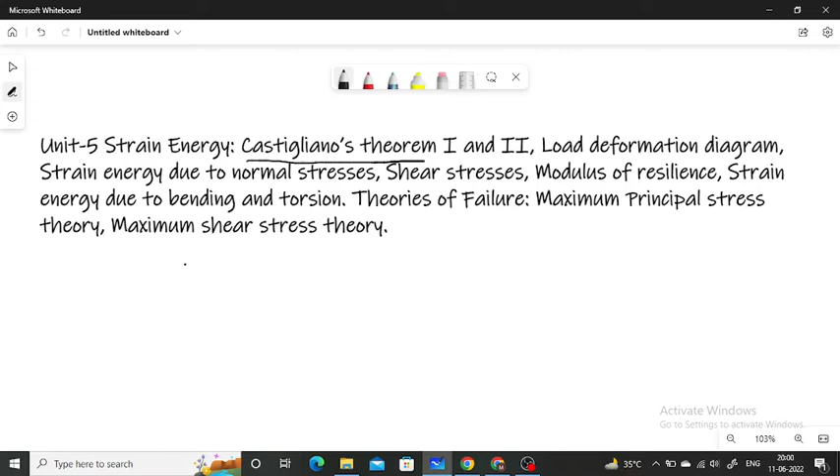What is Castigliano's theorem? Castigliano's theorem, first theorem states that the first partial derivative of total internal energy, known as strain energy, in a structure with respect to any particular deflection component at a point is equal to the force applied at that point and in the direction corresponding to that deflection component.

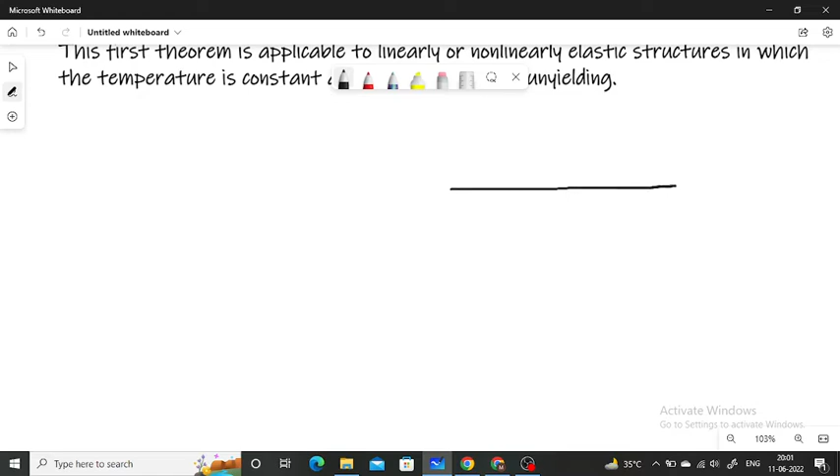Okay, explain करता हूँ। Let us consider a beam, a simply supported beam having point loads W1, W2 and W3 at a distance x1, x2 and x3 from the left support A.

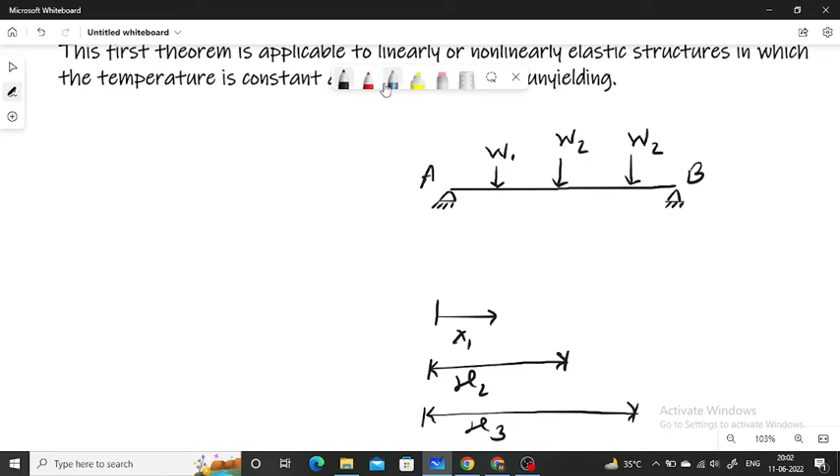Now, due to these point loads, the simply supported beam deflects like this. The deflection at point 1, where W1 point load is acting, is delta 1, the deflection at point 2, where point load W2 is acting, is delta 2, and the deflection at point 3, where point load W3 is acting, is delta 3.

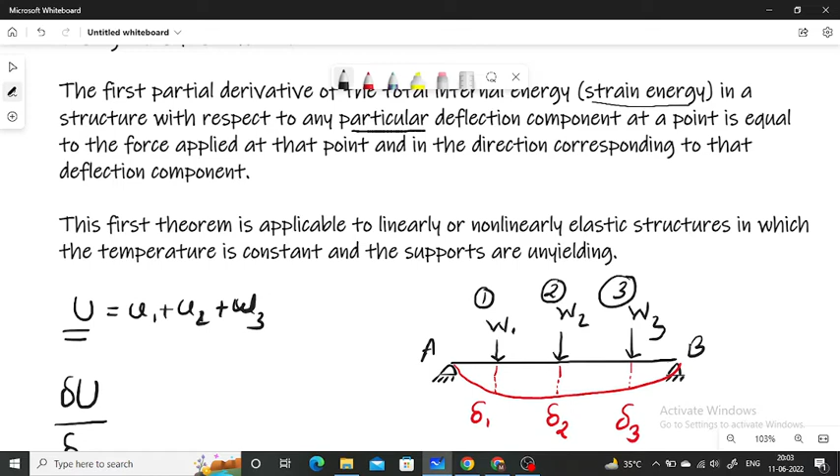According to the Castigliano's theorem, if total strain energy is U1 plus U2 plus U3 is U, then according to the Castigliano's theorem, the partial derivative of total strain energy with respect to deflection component is equal to the force applied. Castigliano's theorem के अकॉर्डिंग, the first partial derivative of the total strain energy in a structure with respect to any particular deflection component at a point is equal to the force applied. So the first derivative of total strain energy with respect to deflection, let this will be like this.

Deflection delta 1 will be equal to the load at that point W1. If we partially differentiate this total strain energy with respect to delta 2, then it will be equal to the point load W2. And last, if we partially differentiate this total strain energy with respect to deflection delta 3, then it will be equal to the point load W3.

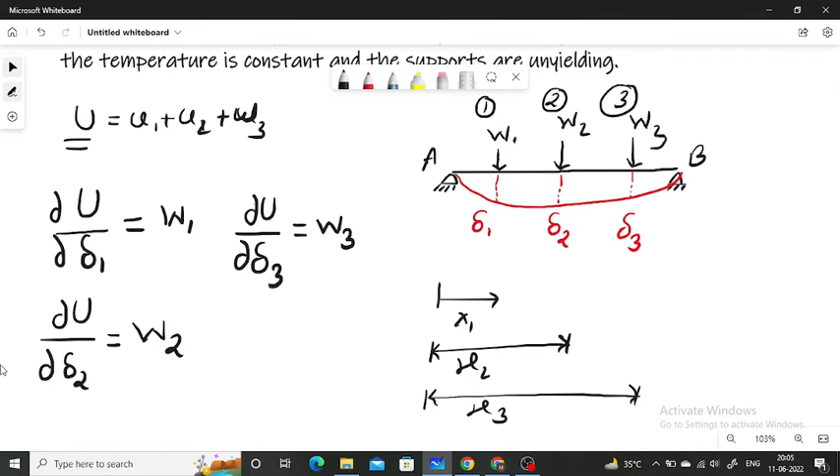Now according to the second theorem of Castigliano's, the first partial derivative of total strain energy in a structure with respect to the force applied at any point is equal to the deflection at the point of application of that force in the direction of its line of action.

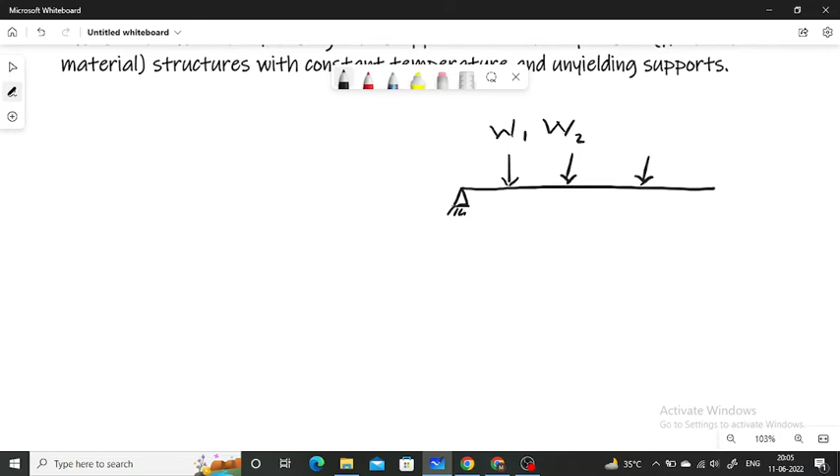Let a simply supported beam having point loads W1, W2 and W3, and due to these point loads the beam will deflect like this, and the deflection under this load W1 is delta 1, deflection under the load W2 is delta 2, and the deflection under the load W3 will be equal to delta 3.

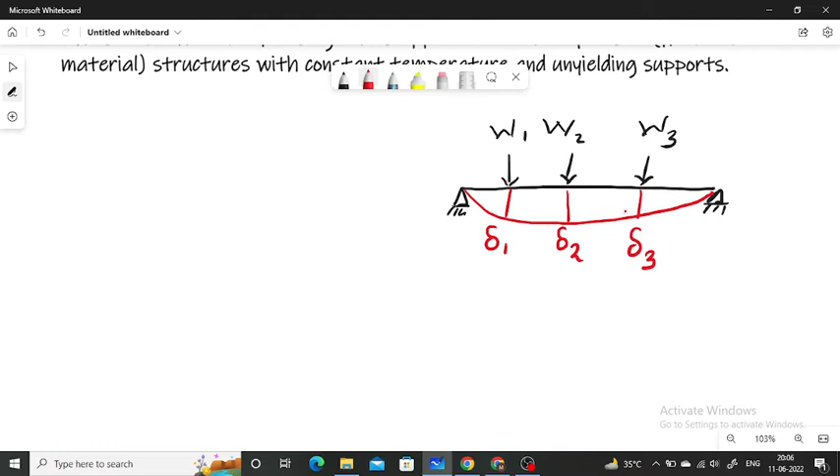If then in that case, according to this Castigliano's second theorem, the partial derivative of total strain energy with respect to load gives deflection at that point in the direction of force load. So del u upon del w1 will be equal to delta 1. Similarly, del u upon del w2 will be equal to delta 2, and del u upon del w3 will be equal to delta 3. This is the Castigliano's theorem.

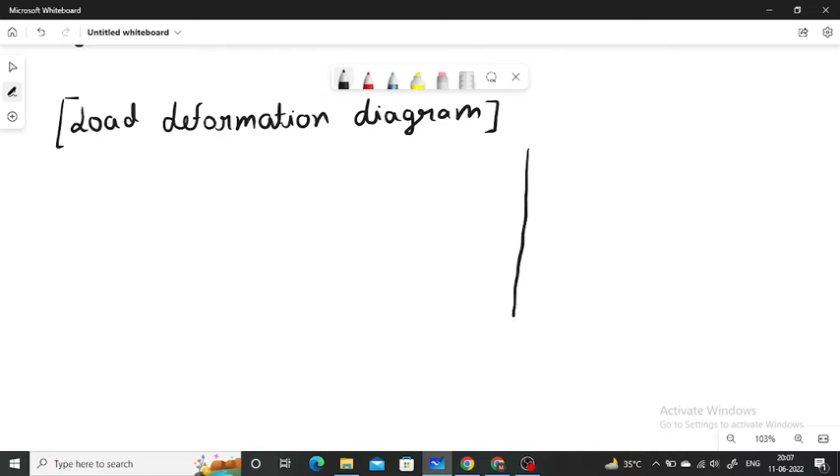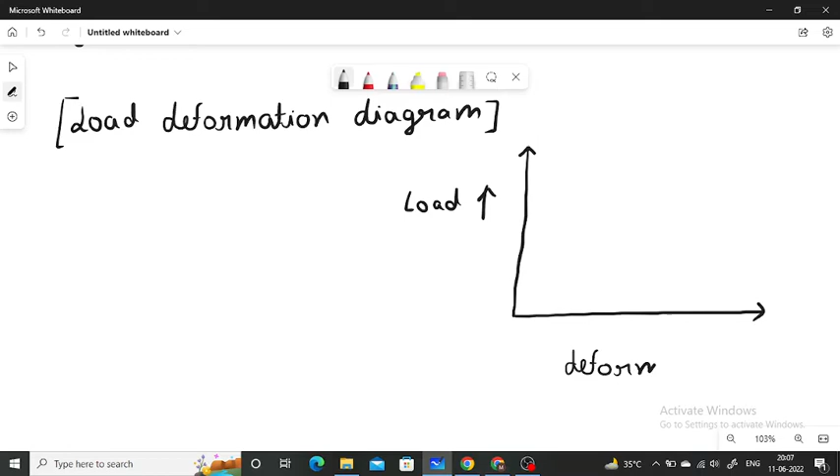Now, second topic is load deformation diagram. What is load deformation diagram? Curve between load and extension or deformation is known as load deformation diagram.

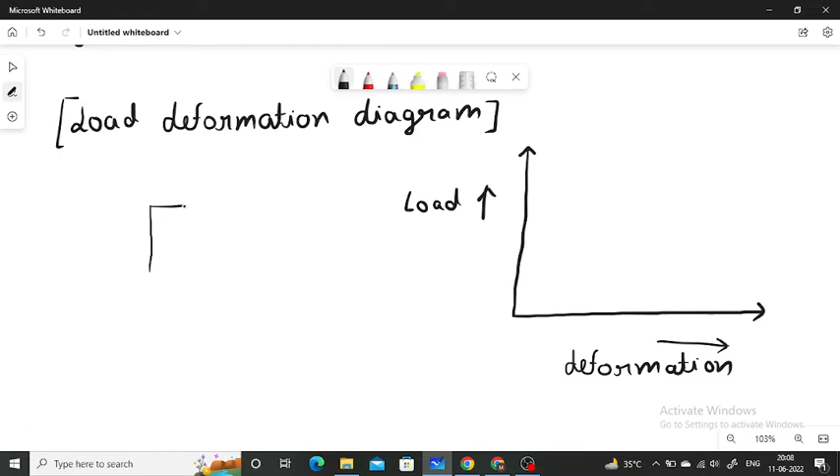Let a gradually increasing tensile force be applied on a bar. At t is equal to 0, force is equal to 0, corresponding deformation in the bar is 0. So at the starting, where force load is 0, deformation is 0. After gradually increasing the load, deformation will also change according to the load applied on the body. Now the curve plotted between these values is known as load deformation curve.

Okay, let's suppose at a point force is F1, so corresponding to this point on this curve, we can calculate, we can define the deflection at that particular point.

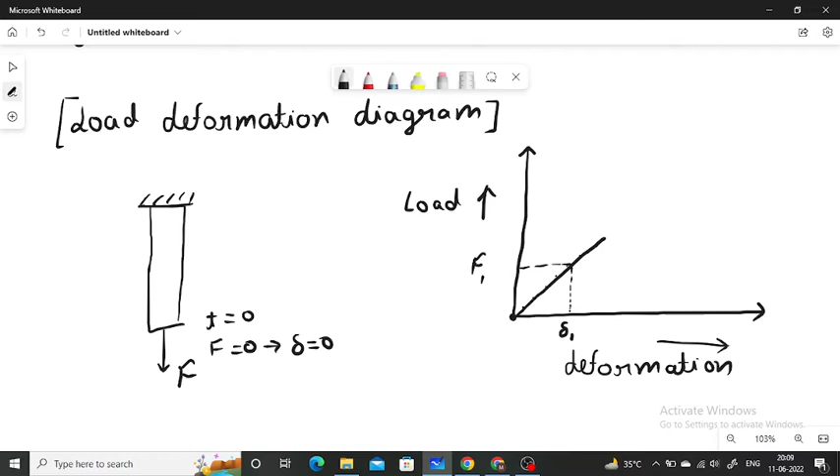Now the next topic is strain energy. This topic is very important. Now what is strain energy?

When an elastic body is loaded, it undergoes deformation. Its dimensions change, and when it is relieved of the load, it regains its original shape if the force applied on the body or material is within the elastic limit. For the time it is loaded, energy is stored in it. The same is released by the body when the load is removed. This energy is called strain energy.

So what is strain energy? Strain energy is stored energy. The work done when we apply a load on a body is stored in the body in the form of energy. This energy is known as strain energy.

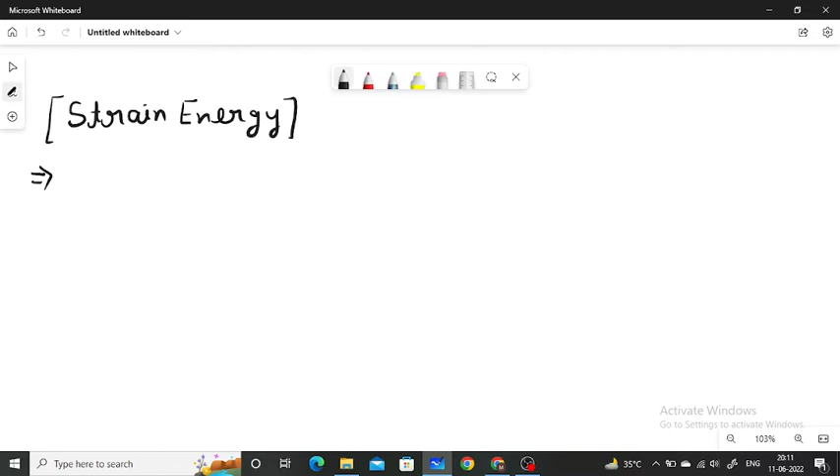The strain energy stored by the body within the elastic limit when loaded externally is called resilience, and the maximum energy which a body stores up to the elastic limit is called proof resilience.

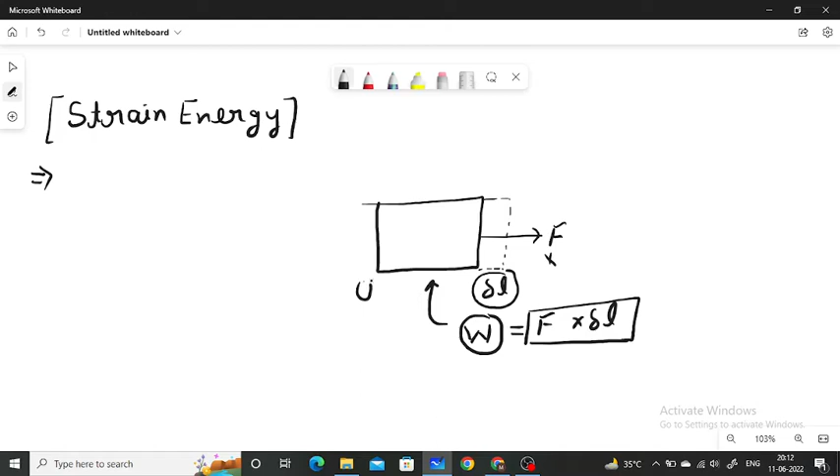So what is strain energy? When we apply a force on a body within the elastic limit, the body undergoes some changes, some deformation. So the work done by this external force is known as force into displacement. This work done is stored in the material in the form of energy. When the load is removed, due to this energy the body will regain its shape. This energy is known as strain energy.

Now, the strain energy stored by the body within the elastic limit when loaded externally is called resilience. So what is resilience?

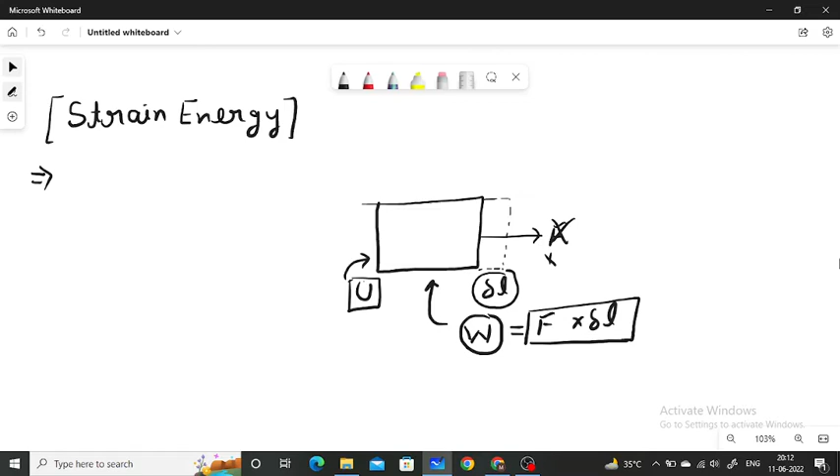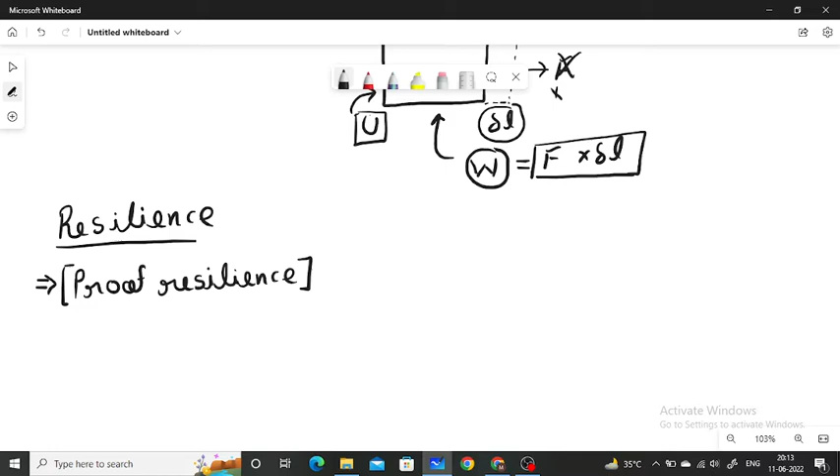Resilience is the strain energy stored by the body within the elastic limit, and proof resilience is the maximum strain energy stored by the body up to the elastic limit. Proof resilience is a mechanical property of the materials, and it indicates their capacity to bear shock.

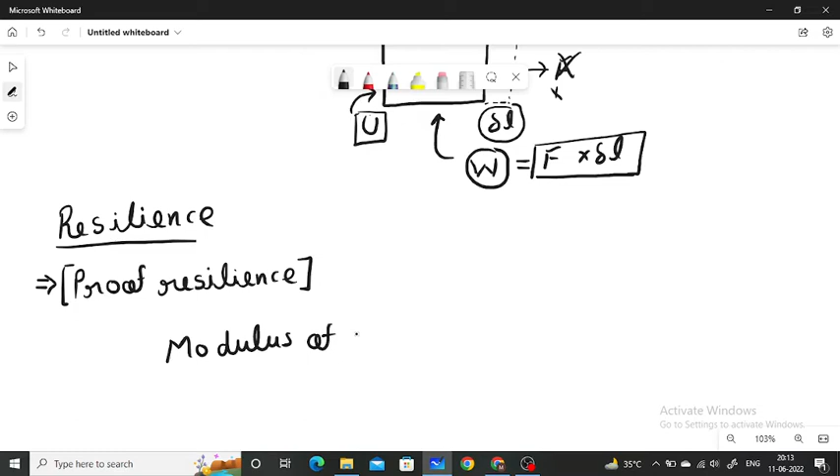Proof resilience per unit volume is known as modulus of resilience. Modulus of resilience is equal to the proof resilience upon the volume of the body. So the maximum strain energy stored in a body per unit volume up to the elastic limit is known as modulus of resilience.

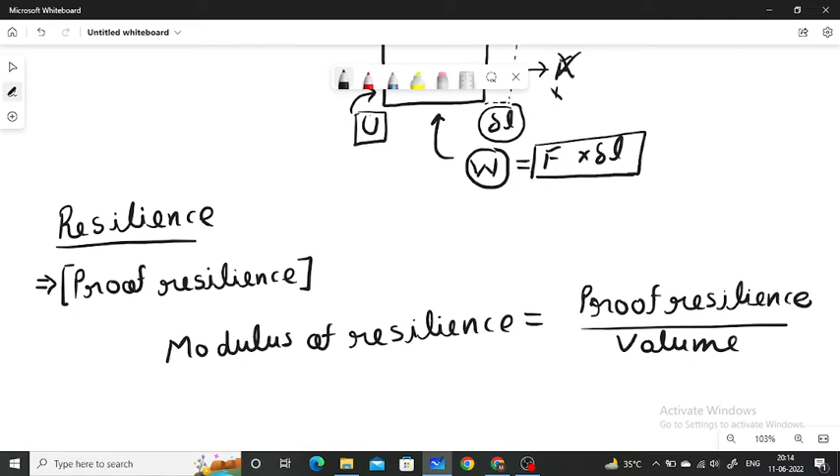Now, strain energy in simple tension and compression. What will be the strain energy in simple compression or tension?

Let a gradually increasing tensile force be applied on a body, due to which a deformation of delta L is produced in the body.

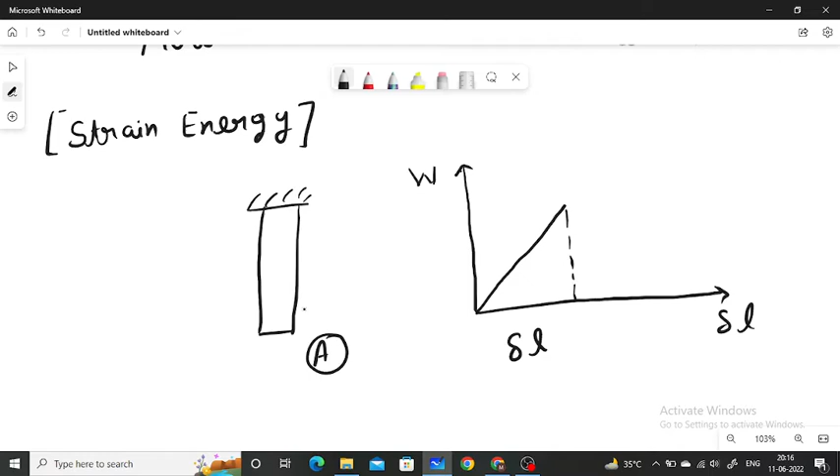Let us take the case of a bar of cross sectional area A and length L, which is subjected to a gradually increasing load W. Suppose this load extends the bar by an amount delta L. Due to this external load, the deformation in the bar is delta L.

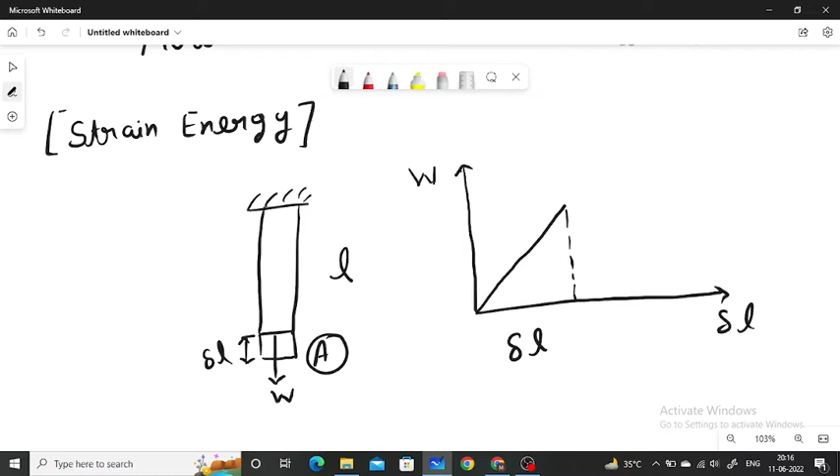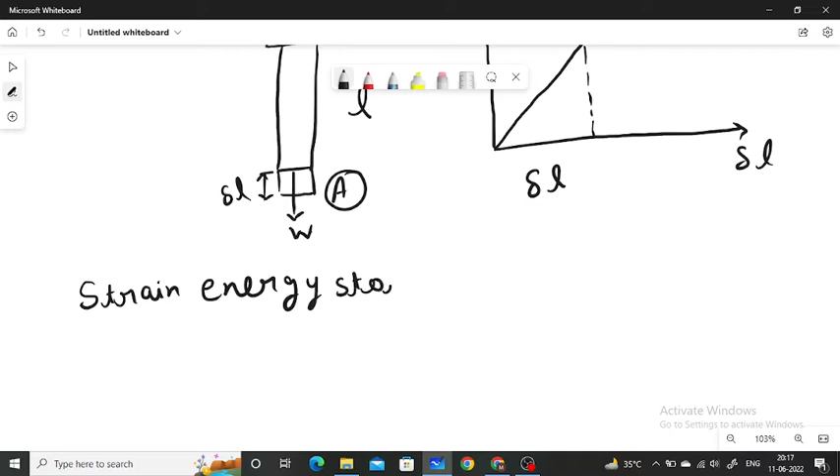Now, the work done by the load will be equal to the strain energy stored in the body. Strain energy stored will be equal to the work done. Here, work done will be equal to the area under the curve, so the area of this curve will be equal to 1 by 2 W into delta L.

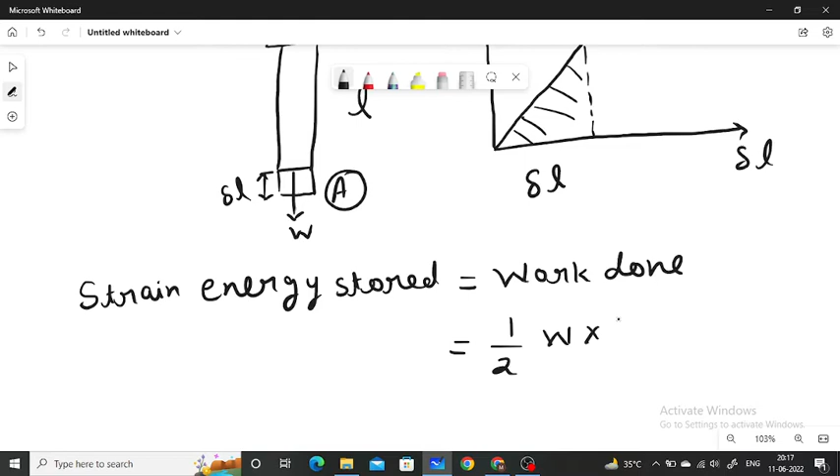So strain energy stored, U, is equal to 1 by 2 W into delta L. We know that stress is equal to force upon area, which implies force is equal to stress into cross sectional area.

And we know that strain is equal to stress upon modulus of elasticity, or strain (change in length upon initial length) is equal to stress upon modulus of elasticity. From here, change in length will be equal to sigma into L by E.

Now, putting these values in the equation, strain energy will be equal to 1 by 2 sigma into A into sigma into L upon E. So from here U will be equal to 1 by 2 sigma square upon E into A into L.

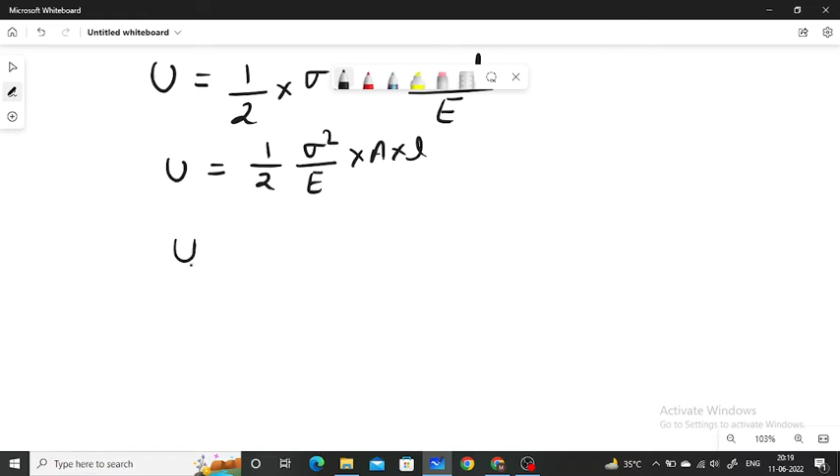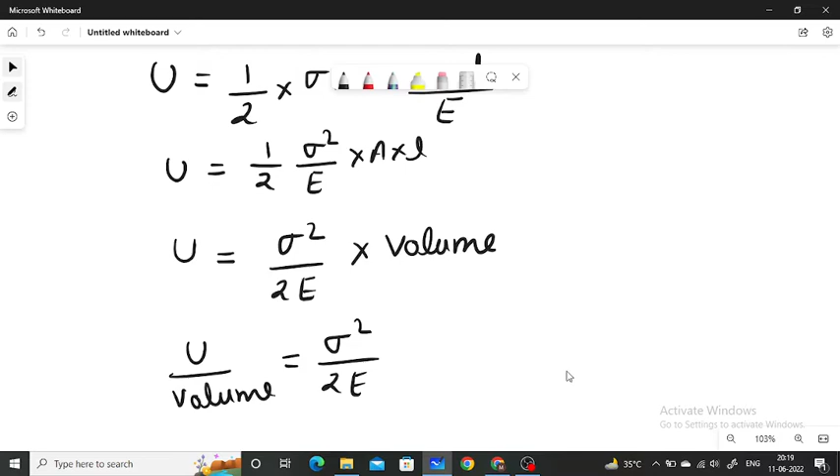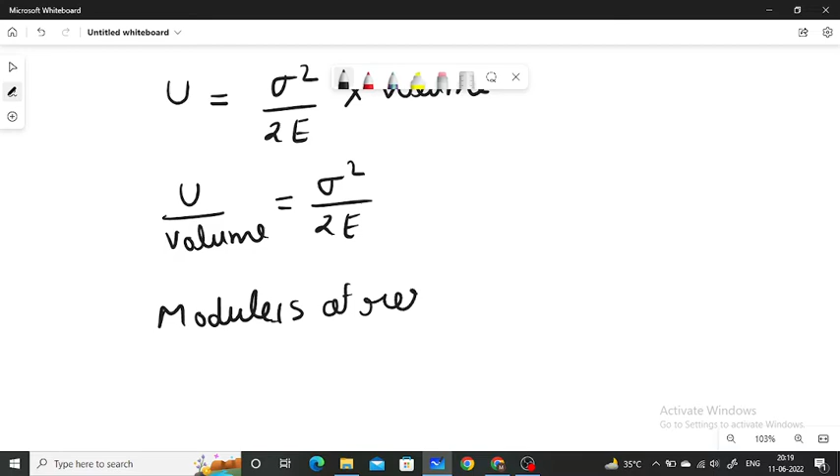Here A into L is the volume of the bar. So U will be equal to sigma square upon 2E into volume of the bar, or strain energy upon volume will be equal to sigma square upon 2E. If the load applied on this bar is up to the elastic limit, then the modulus of resilience will be equal to sigma square upon 2E.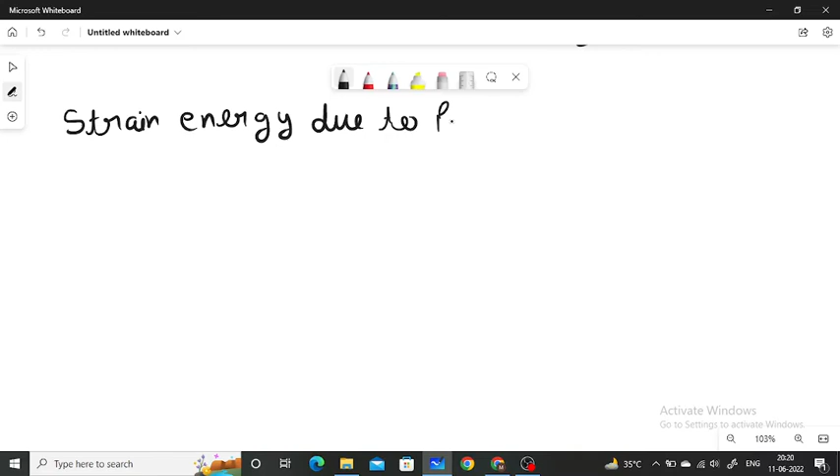Now, strain energy due to pure shearing, or due to shear stress.

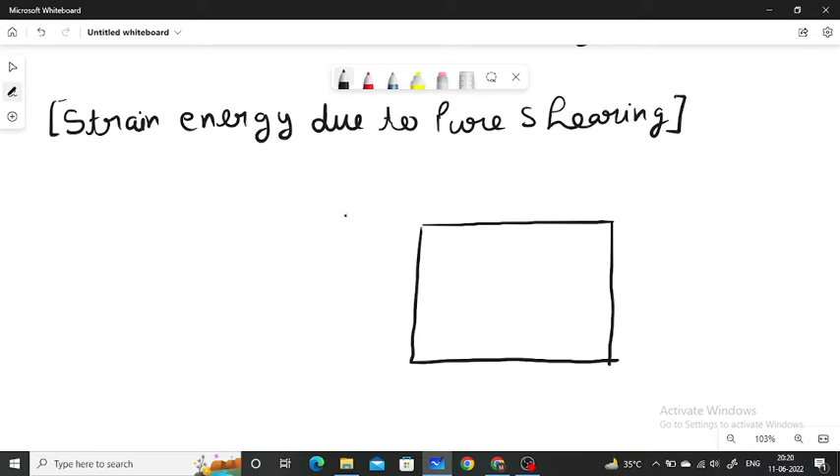Consider a rectangular block of material, of unit length and unit depth, ABCD, subjected to shearing force F acting across two of its opposite faces.

The face AB will move relative to DC a distance BB dash.

BB dash will be equal to BC into phi. If this angle phi is very small, tan phi is equal to phi. So from here, in the right angle triangle BB dash C, BB dash is equal to BC into phi.

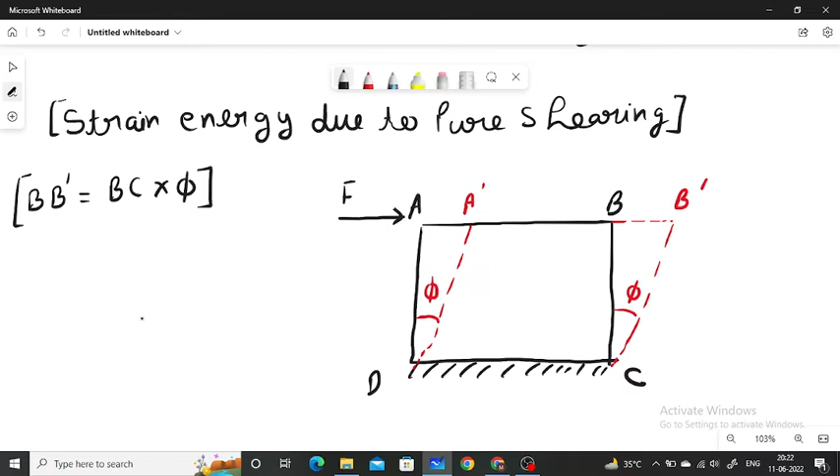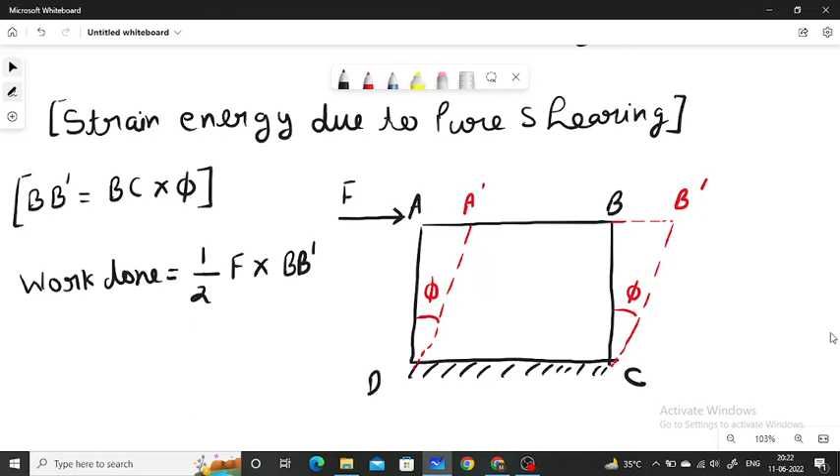Now the work done by this shear force will be equal to 1 by 2 into F into deformation, where deformation is BB dash. If the shearing force is gradually increasing, the work done will be equal to 1 by 2 F into BB dash. We know that BB dash is equal to BC into phi.

Work done, equation 1. We know that shear force is equal to shear stress into area AB, and shear strain is equal to shear stress upon modulus of rigidity.

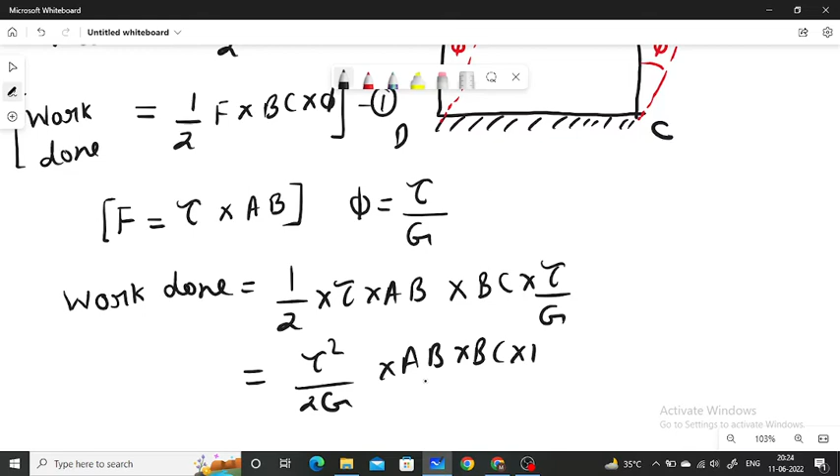Now putting this value in equation number 1, work done will be equal to 1 by 2 tau into AB into BC into tau upon G. It will be equal to tau square upon 2G into AB into BC into 1. AB into BC into 1 is the volume of this body.

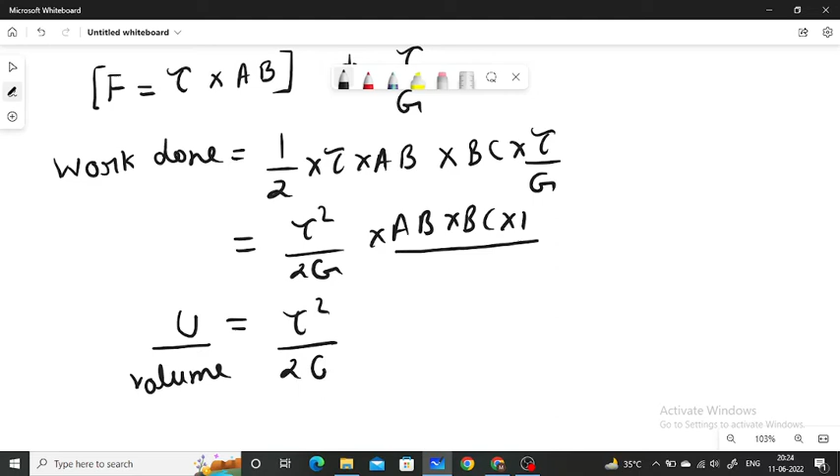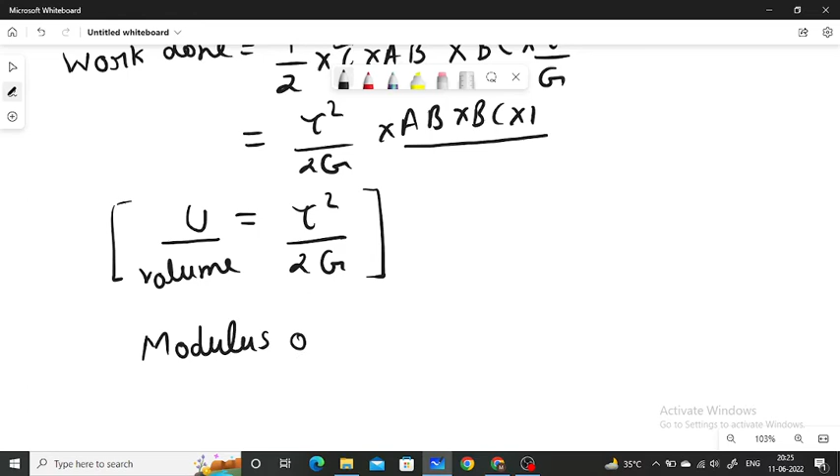Total work done is equal to strain energy, so strain energy per unit volume will be equal to tau square upon 2G. Strain energy per unit volume is known as modulus of resilience. So in the case of pure shearing, modulus of resilience will be equal to tau square upon 2G.

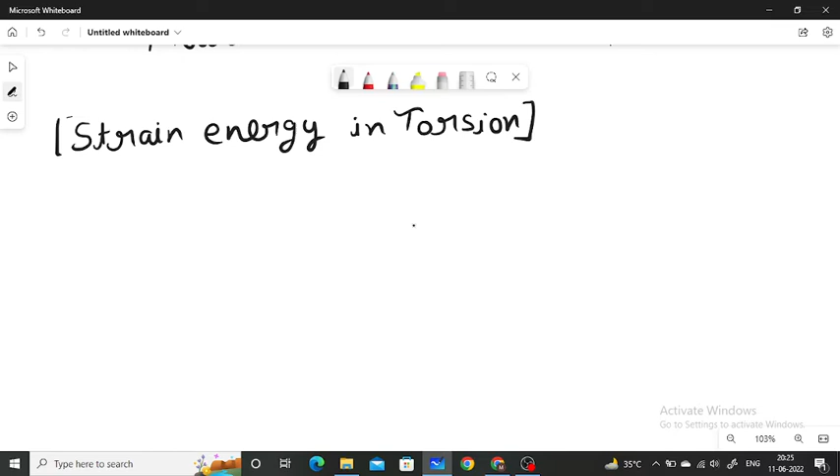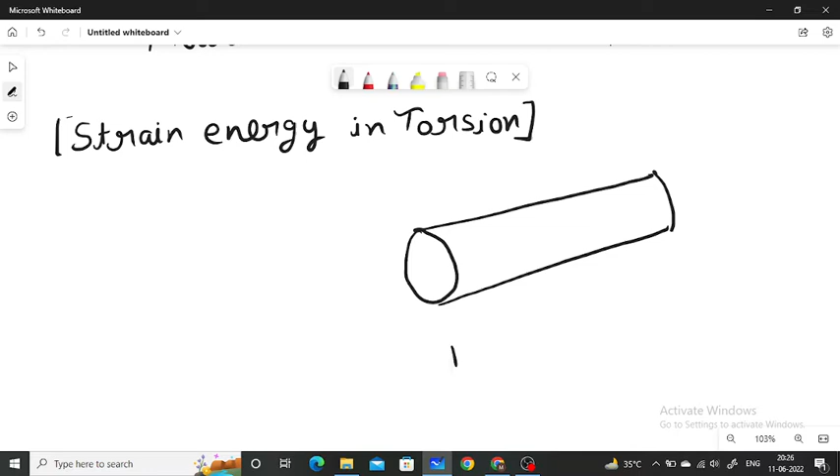Now, next topic is strain energy in torsion. Let us consider a shaft of length L and radius R, subjected to a torque T. Due to this torque, angle of twist is theta and shear angle is phi.

Now due to this torque, work done will be equal to 1 by 2 T into theta. This is equation number 1.

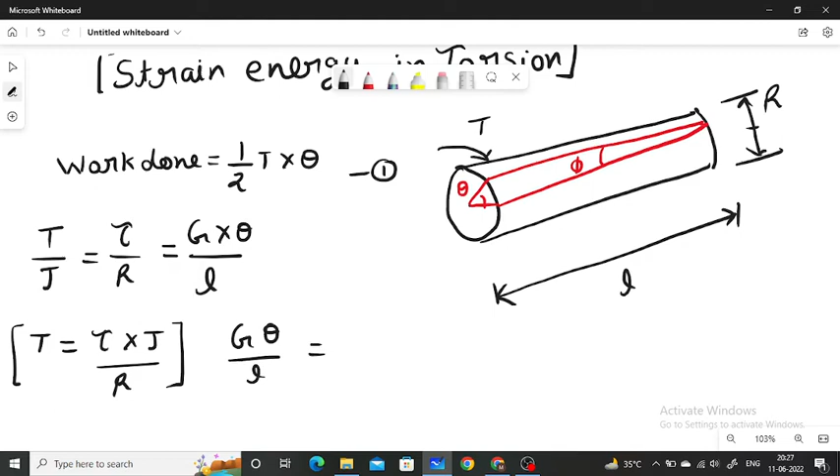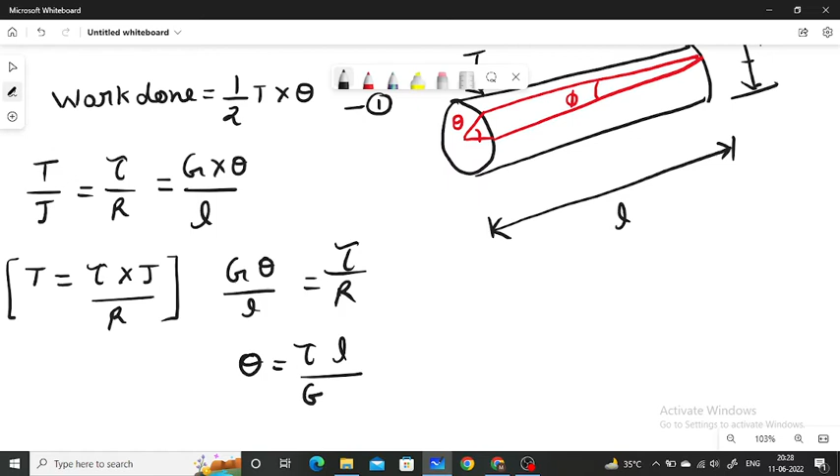From the torsion equation, T by J is equal to tau by R is equal to G into theta by L. Now from here, T is equal to tau into J upon R, and theta will be equal to tau into L upon G into R. Putting these values in equation number 1,

work done or strain energy is equal to 1 by 2 into tau into J upon R into tau into L upon G into R. Now from here, strain energy U is equal to tau square upon 2G into R square into J. We know that J is equal to pi R to the power 4 upon 2.

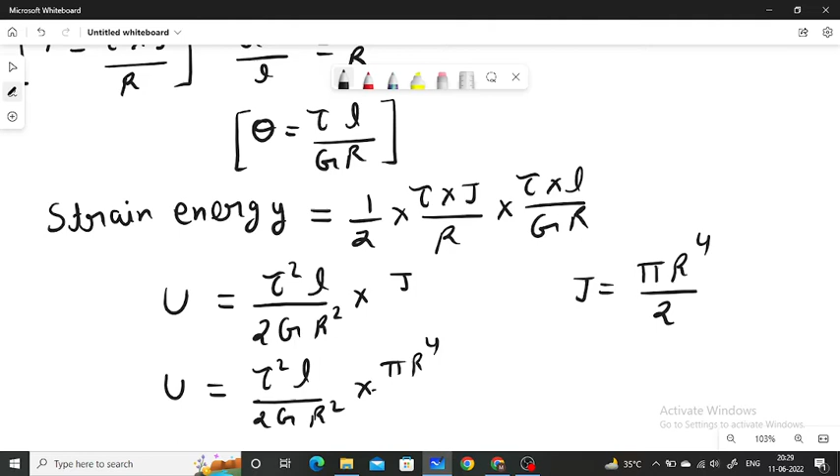Now putting this value in the equation, U will be equal to tau square into L upon 2GR square into pi R to the power 4 upon 2. Now from here, U will be equal to tau square upon 2G into pi R square by 2 into L. This is the volume of the shaft.

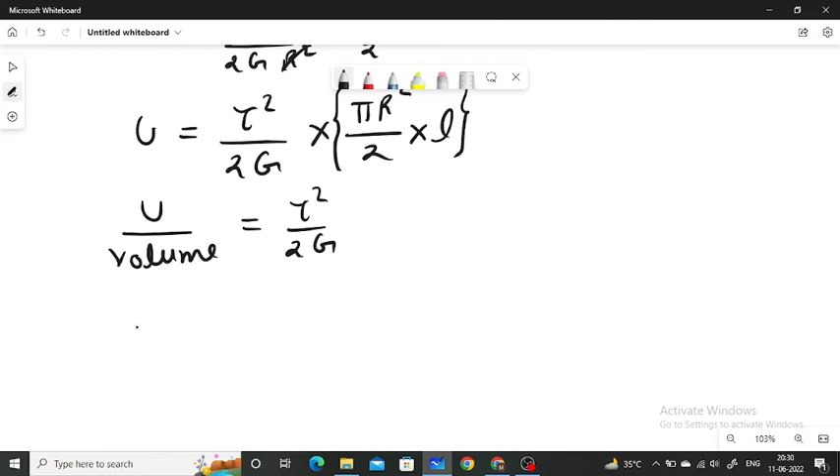So strain energy upon volume is known as equal to tau square upon 2G. So from here, modulus of resilience due to torsion will be equal to tau square upon 2G.

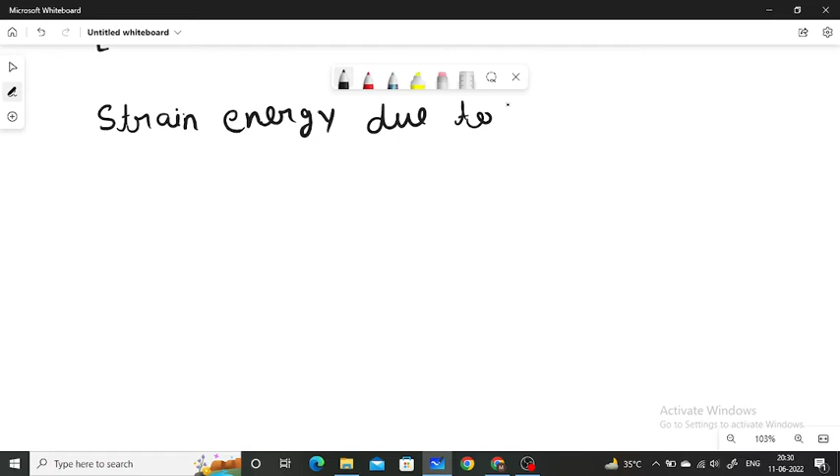Now come to the next topic, strain energy due to bending. Let us consider a beam of uniform cross section.

Let us consider a layer at a distance y from the neutral axis, of thickness dy. Suppose A, B, C, D will be the strip. If the width of the cross section is B and the length of this layer is dx,

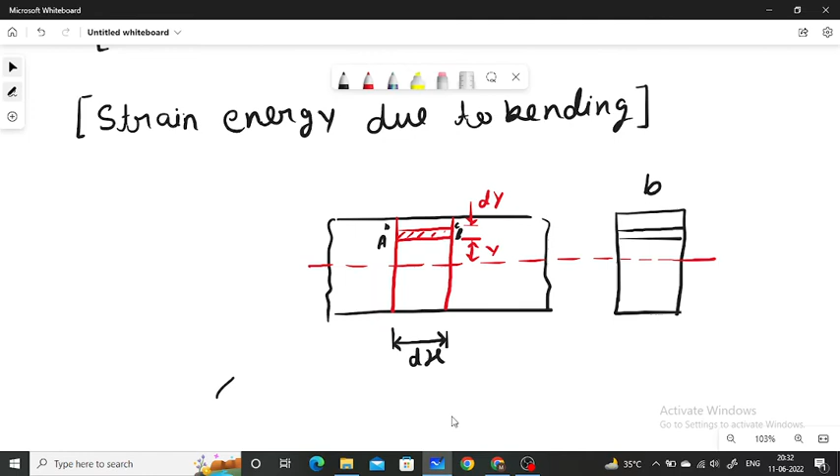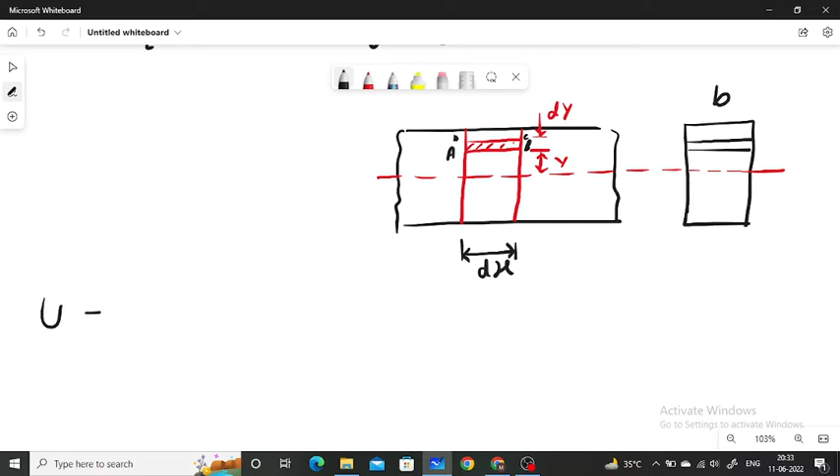in that case the strain energy on this section will be equal to sigma square upon 2E into volume of this section strip. Now what will be the volume of this section? It will be equal to dx into dy into b, this is the volume of this section.

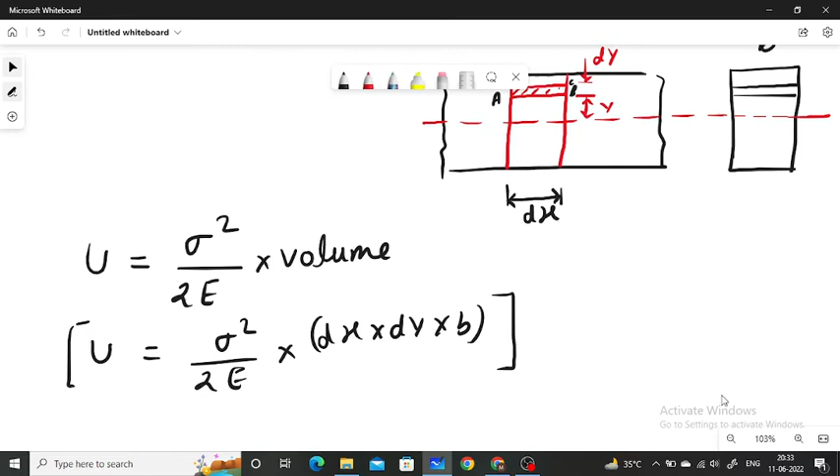Now from the bending equation we know that M upon I is equal to sigma upon y is equal to E by R. Now from this bending equation, sigma is equal to M into y upon I.

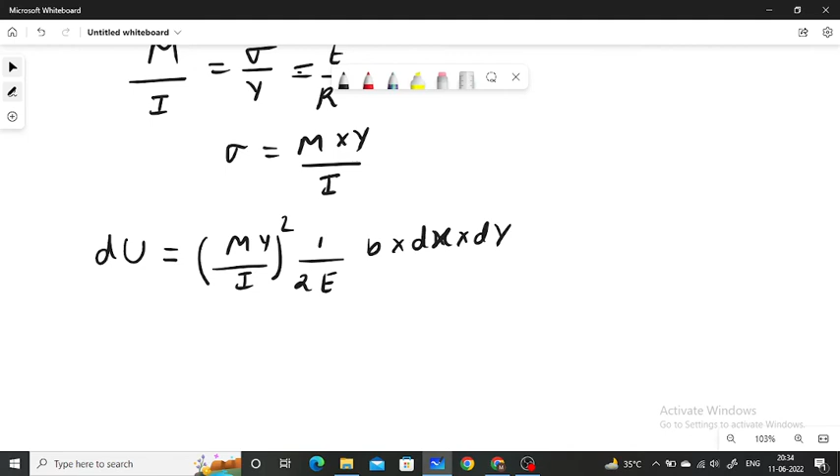Now putting this value in equation number 1, U will be equal to (My upon I) square into 1 upon 2E into b into dx into dy. This will be the strain energy on the strip.

Now the total strain energy on the section will be the integration of M square y square upon 2E into I square into b into dx into dy. Now M square into dx upon 2E into I square is common, constant, leaving b into y square into dy.

Integration of b into y square into dy is equal to the second moment of area, known as moment of inertia, so it will be equal to I. Now strain energy will be equal to M square upon 2EI into dx.

The above expression gives the strain energy of the beam for dx length. So the strain energy for the whole length of the beam will be equal to M square L upon 2EI. This will be the strain energy due to bending moment.

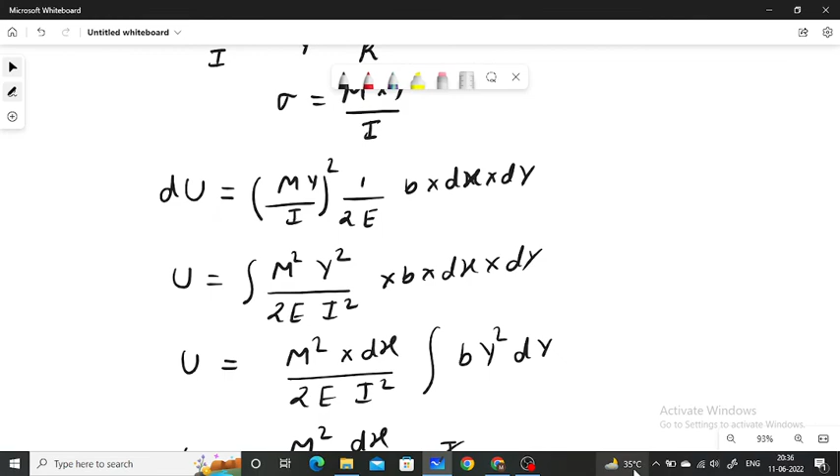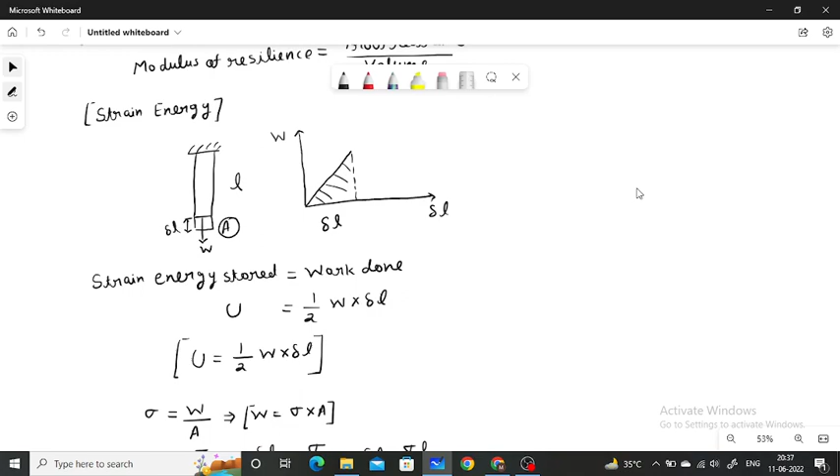Now next topic. We have discussed Castigliano's theorem first and second, load deformation diagram, strain energy due to normal stresses, shear stresses, modulus of resilience, strain energy due to bending and torsion. Now the last topic is theory of failure: maximum principal stress theory and maximum shear stress theory.

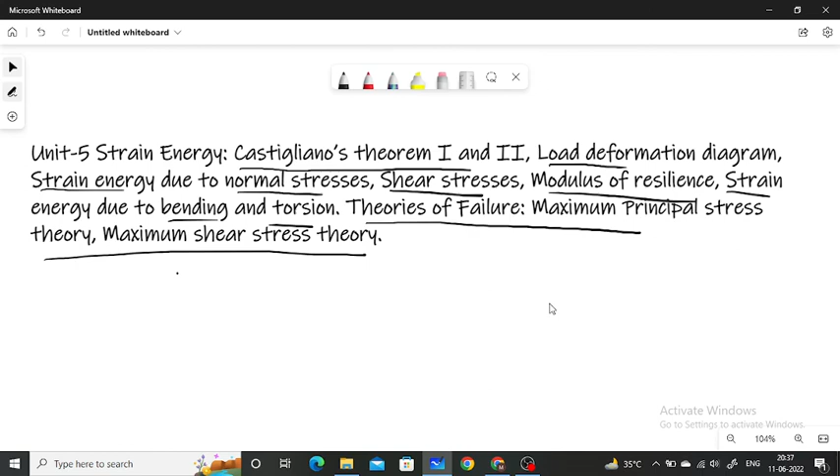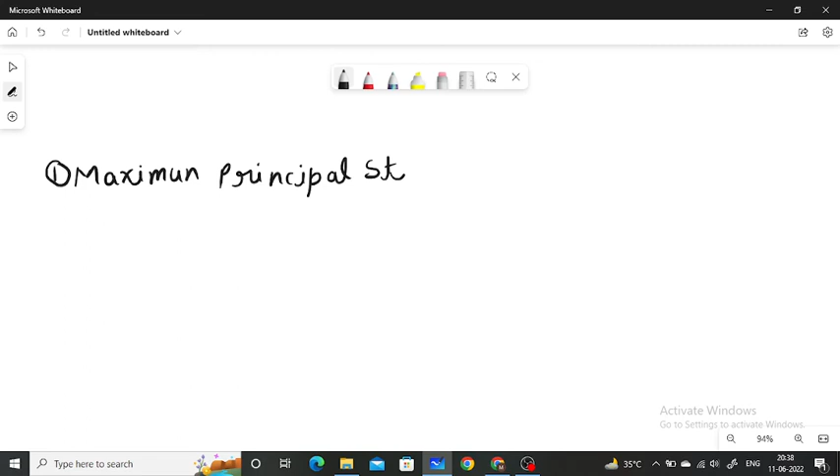Now what is maximum theory of failure? So first theory is maximum principal stress theory. Now what is maximum principal stress theory?

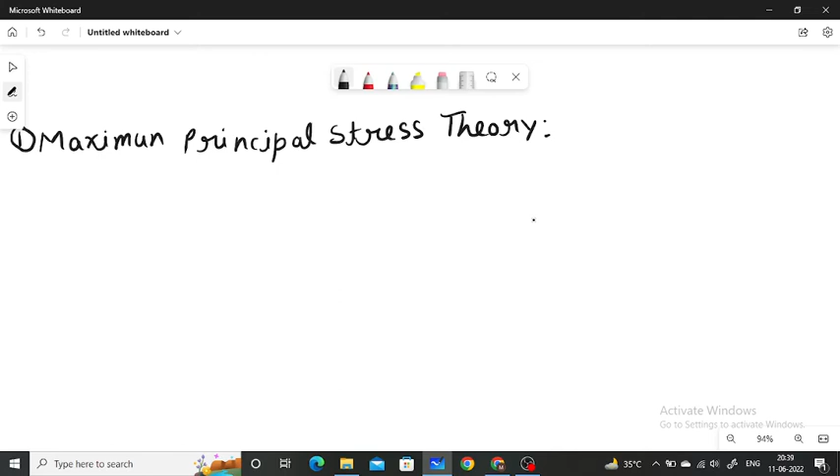Let us consider a body subjected to three mutually perpendicular stresses acting in x, y and z direction: sigma 1, sigma 2 and sigma 3, and elastic limit of this material is sigma E. Yield stress of this material is sigma E.

So according to this maximum principal stress theory, failure will occur when the maximum principal tensile stress in the complex system reaches the value of maximum stress at the elastic limit in simple tension, or the minimum principal stress reaches the elastic limit stress in simple compression. Let here sigma 1 is greater than sigma 2 and greater than sigma 3. In that case, sigma 1 is the maximum principal stress.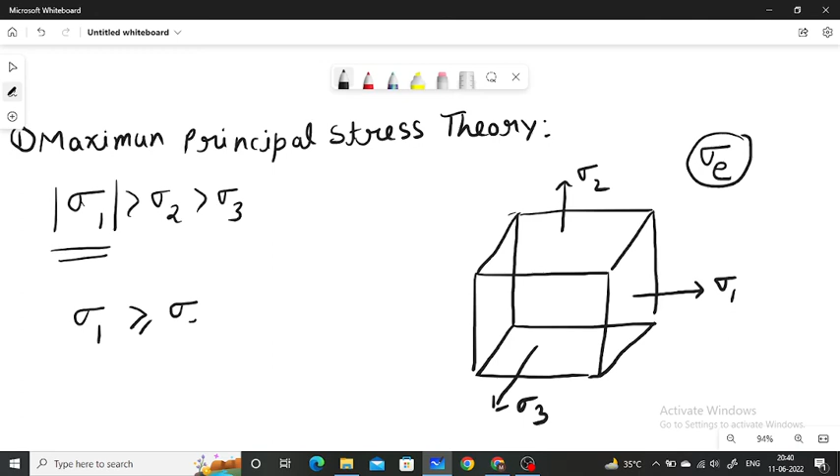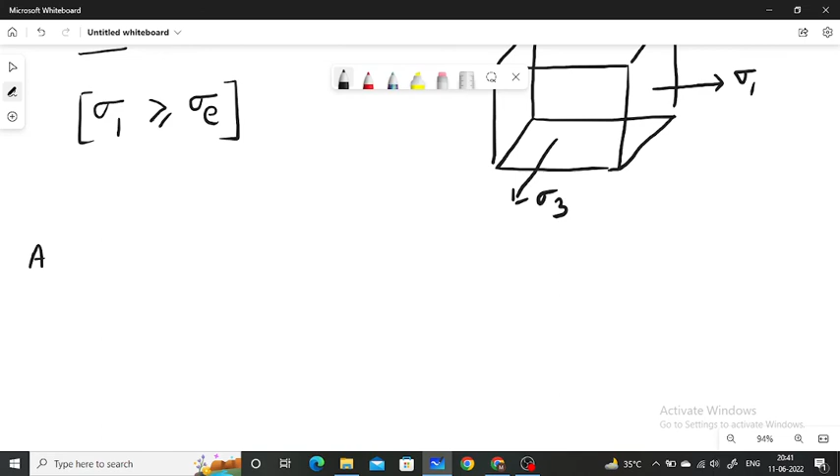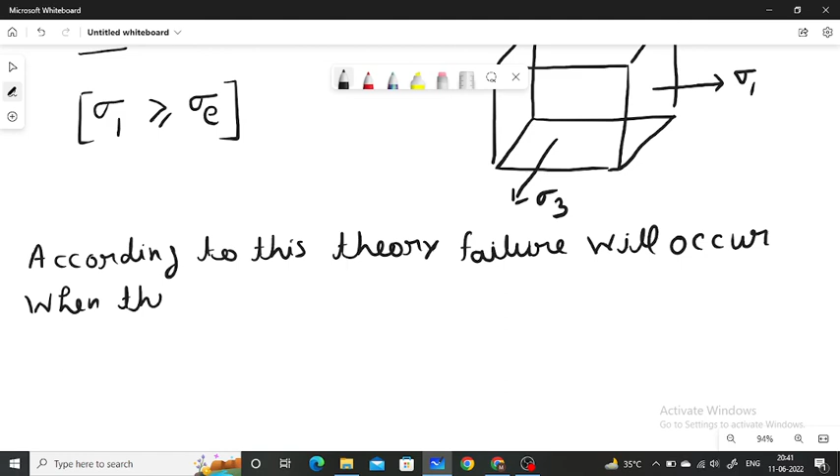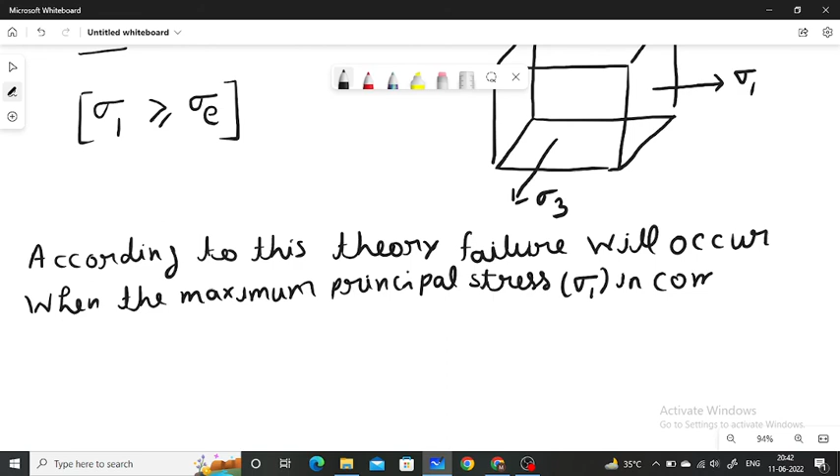So according to the maximum principal stress theory, failure will occur if sigma 1 is greater than or equal to sigma E. So according to this theory, failure will occur when the maximum principal stress sigma 1 in the complex system reaches the value of maximum stress at elastic limit, sigma E, in simple tension.

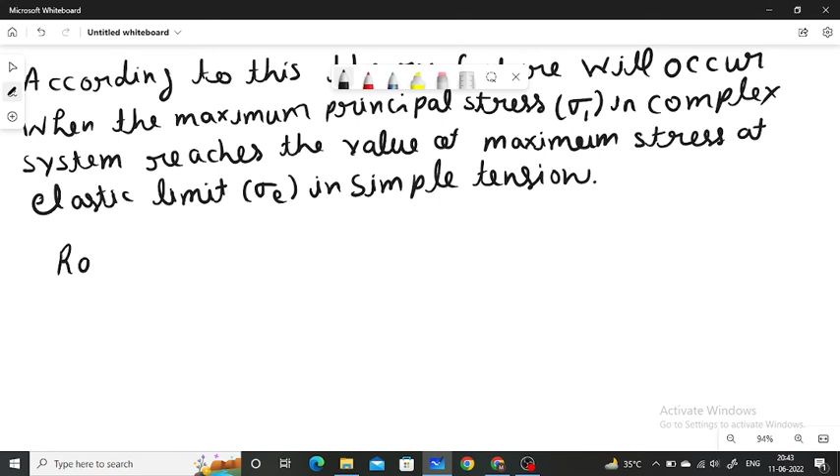This is the simplest and oldest theory of failure. This theory is also known as Rankine theory.

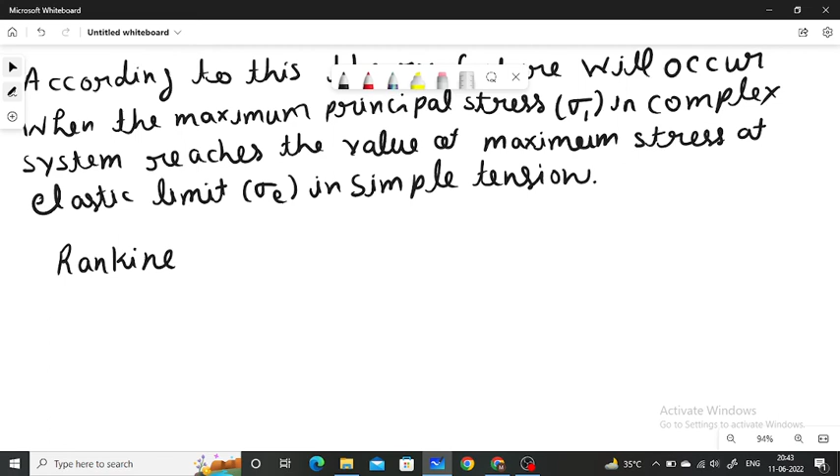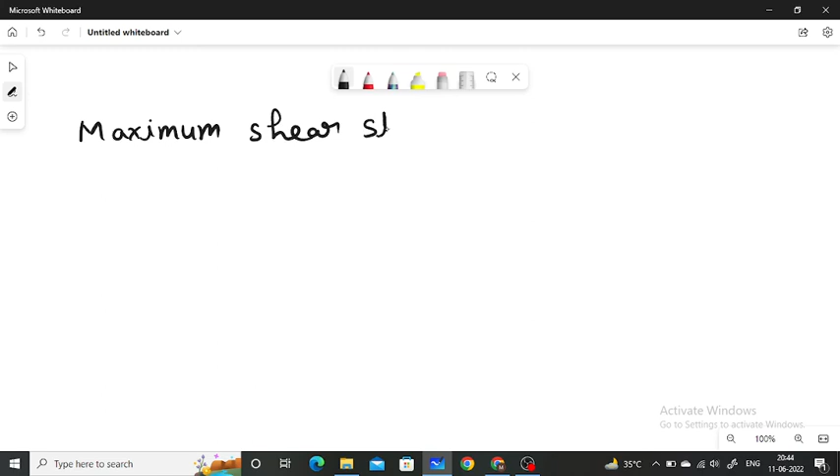Now come to the next theory of failure: maximum shear stress theory.

This theory implies that failure will occur when the maximum shear stress in the complex system reaches the value of the maximum shear stress in simple tension at the elastic limit.

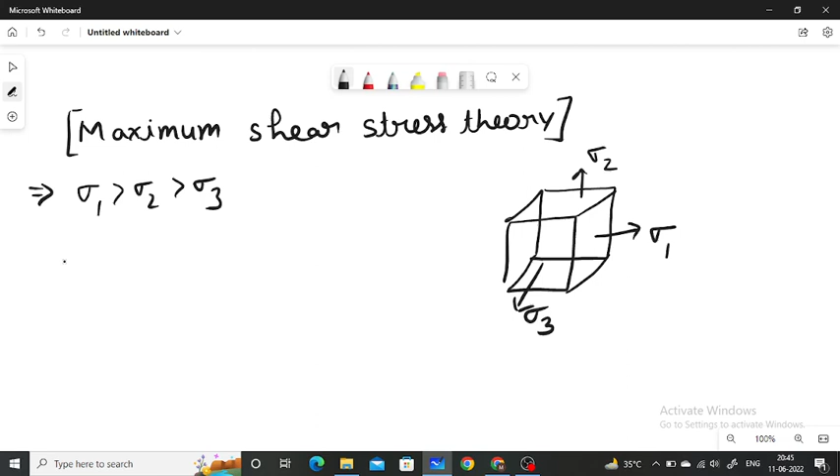According to the maximum shear stress theory, if three mutually perpendicular stresses are acting in x, y, z direction - sigma 1, sigma 2, sigma 3 - and sigma 1 is greater than sigma 2 and this is greater than sigma 3, in that case maximum shear stress will be equal to sigma 1 minus sigma 3 divided by 2. So this theory implies that failure will occur when the maximum shear stress in the complex system reaches the value of maximum shear stress in simple tension.

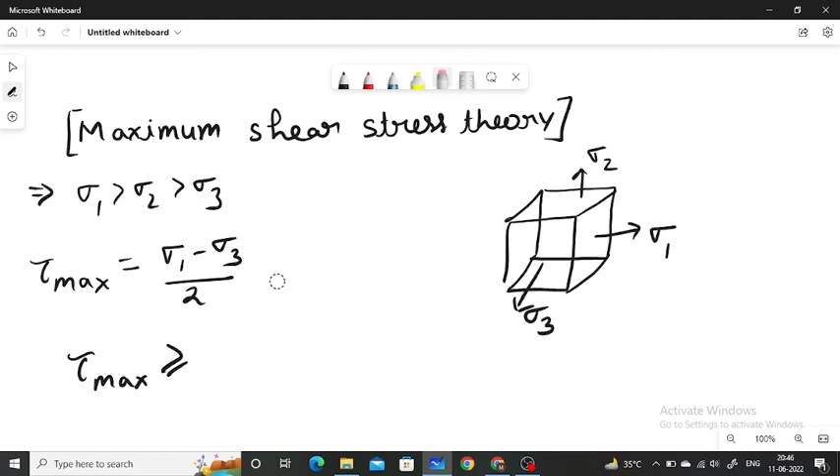If this is equal to sigma, let's say tau e. Here tau maximum is sigma 1 minus sigma 3 by 2, and tau e is equal to sigma e by 2. So if sigma 1 minus sigma 3 is greater than or equal to sigma e, failure will occur according to the maximum shear stress theory. This theory is also known as Guest theory or Tresca theory. Here sigma 1 is the maximum principal stress and sigma 3 is the minimum stress. If this is greater than or equal to sigma e, failure will occur.

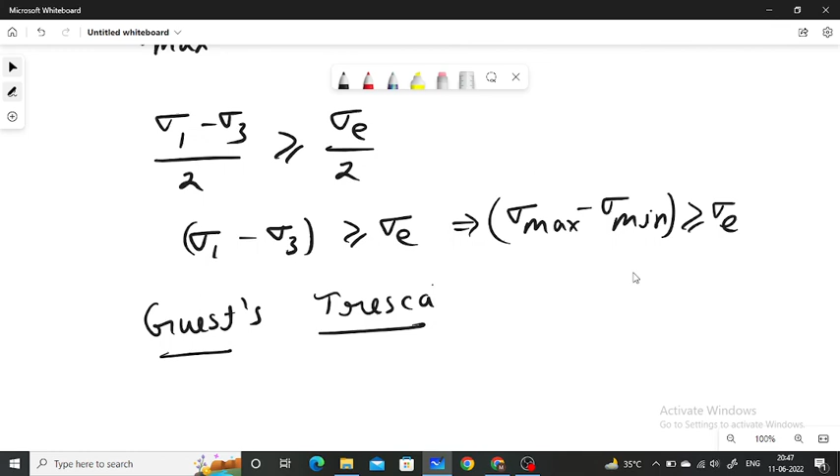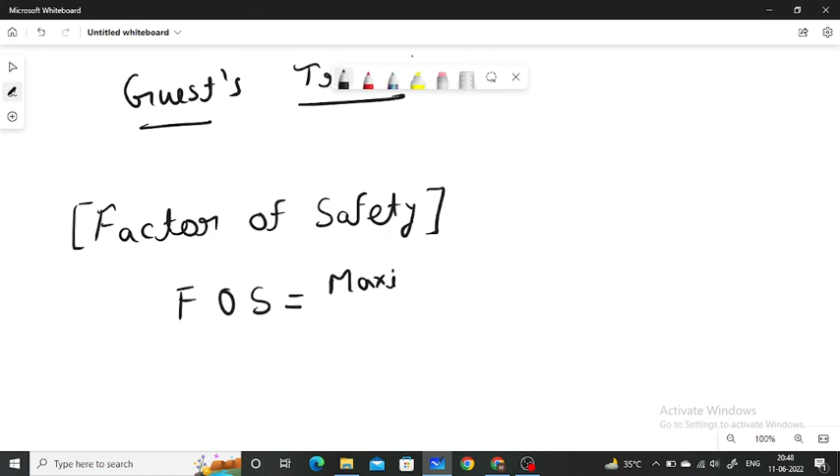Now, what is factor of safety? Last topic is factor of safety. Factor of safety, or FOS, is equal to maximum stress upon working stress.

Let's suppose a cable is designed for a lift. The yield stress of the material of the wire is 200 Newton per meter square, and the load applied on this cable - if the maximum load applied on the cable is W, and due to this maximum load the allowable or working stress is 100 Newton per meter square. Here the maximum load that can be applied on the lift is W, and due to this maximum load the working stress is 100 Newton per meter square in the cable. In that case, factor of safety of this cable is 200 upon 100, it means 2.